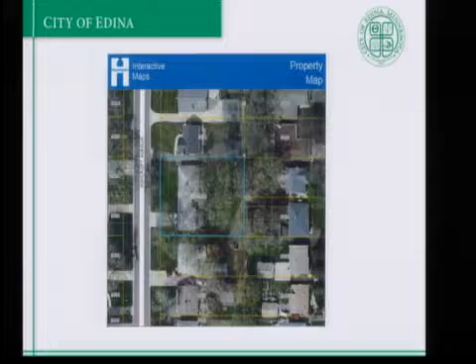It's double the size of all lots along this block and the block behind. This is an area that was originally platted with 50-foot wide lots. What you're seeing here is the original plat. You can see when this property was built, the home was built in 1953, and at that time the property owner purchased two 50-foot wide lots, combined them, and built one single-family home, Rambler style, as you see on the aerial here. This is a photograph of the existing home.

So what the applicant is proposing is to divide the property into two 50-foot wide lots, essentially reestablishing the original plat. The existing home obviously would have to be removed, with two new homes that would be located generally in the location of the existing footprint of the home.

Closer look at this is the existing home as it sits today. You see there are a few trees on the site, not too many. They would not be disturbed with the building pads as shown here. This plat would be subject to the new tree ordinance, so should those trees be removed, they would have to be replaced. There's no plans, however, to remove those trees.

Minimum lot size in this area is 9,000 square feet, 75 feet in width, and 135 feet in depth. As the Commission recalls, in neighborhoods where the lots are larger than 9,000 square feet, 75 feet in width, the minimum lot size becomes the median of all homes within 500 feet. However, in this neighborhood, all of the lots are smaller than the minimums required. So the median in this area is 6,790 square feet. The median width is 50, and the depth is 135.

So while the proposal is consistent with the median, it does require variances from the minimum lot area of 9,000 square feet and 75 feet in width. So the requests before the Planning Commission are for those two variances and the subdivision, the preliminary plat.

So the primary issue for consideration is in regard to the variances. Are the variance findings and criteria met? In this case, staff does believe that the criteria is met. The practical difficulty in this situation is the existing size of the lot. It's not a condition that was created by the applicant. Again, it was the original property owner who combined those two properties. So they're sitting today with a lot that's double the size of everyone else on this block.

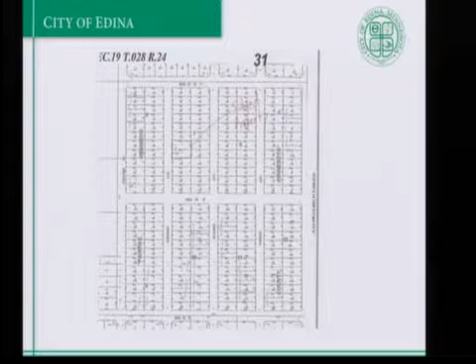Again, you see the original plat. So staff also believes the request is reasonable. It's again similar to everything that you see across the street, to the north, to the south, and to the east on this block. Again, it restores that original plat. If this were denied, they would be denied a use and a size of lot that everyone else on this block has today.

There have been similar variances requested in this area. This is a map showing over about the last 8 or 9 years. Three of them have been approved and three have been denied. The three that have been approved are in this upper area here, 1, 3, and 4, and those denied are a little bit further south.

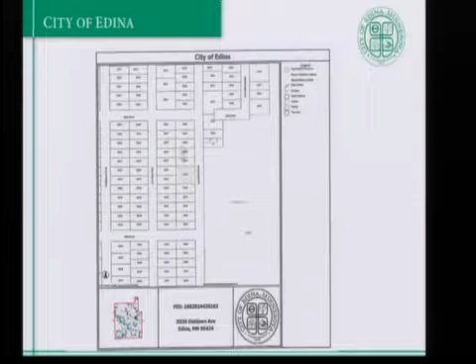To show you some of the detail, this was one that was approved at 5920 Oak Lawn. As you can see, the proposed subdivision was the last one on the block, similar to the one before you this evening. So again, this one was approved.

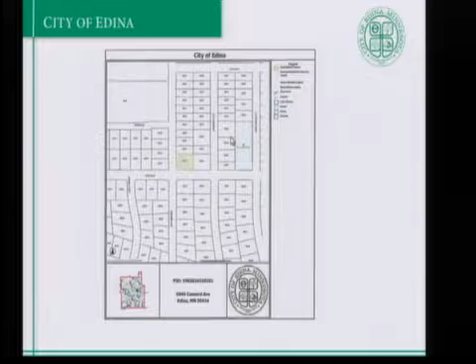To show you a couple that have been denied, this one down in Concord is the most recent denial, back in 2012. It's a corner lot, and you notice the lots are larger to the south, and there's some larger lots to the west, with the adjacent property to the east. The median in this instance came in at over 10,000 square feet, and the median width was 77 feet. So that one was denied.

And then some over closer to Pamela Park, right in here. This one on Oak Lawn was one that was denied. And there was this one on Brookview that actually shows up on our list in the staff report twice—one was withdrawn and one was denied. Again, this is an area where the lots are 100 feet in width, so those were denied.

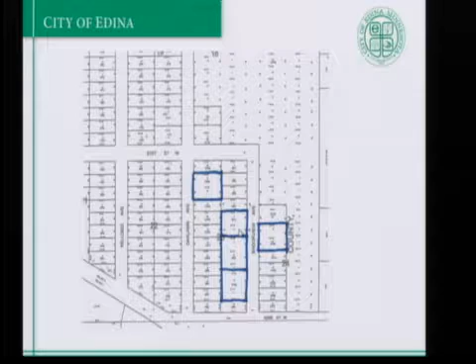So in conclusion, based on the findings in the staff report, staff is recommending approval of this request subject to the conditions that are also outlined. So with that, I can stand for any questions.

Thanks, Gary. Any questions for Planner Teague? Yes. Okay, so I'm not sure if there is some geographic favoritism in regards to accepting or denying subdivisions, but where does this particular lot fall in relation to the ones that have been approved and denied?

Good question. It's located roughly right here. Okay, so kind of in this northern area where they have been approved. This area up here, the lots are smaller. Down a little bit further south, there are more lots that developed as 100-foot wide lots. Okay, thanks.

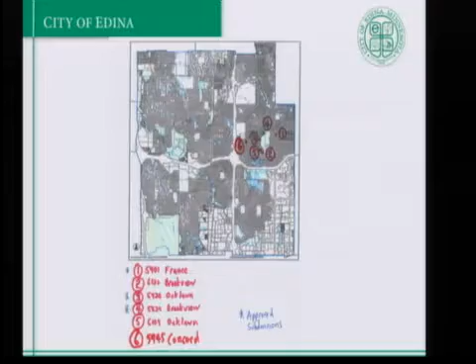Anything else? Commissioner Forrest: I understand that two 50-foot wide lots are a reasonable use, but what's actually the practical difficulty here? Because they are not being denied the use of their property, as others in the neighborhood can use theirs.

They have a house on it. They certainly have a use of their property, but the practical difficulty, or the physical uniqueness of the site, is the fact that—let's go back to the site—they are sitting on a lot that's double the size of everyone else on the block here. So they have reasonable use of their property, but is it reasonable in the context of everyone else on the block having a 50-foot wide lot?

And what makes it unreasonable then, that you can't have two houses on that parcel? Well, it's somewhat subjective. You could think it's reasonable to have a single-family home on the property today. I guess what I want to know is what's the difficulty here? Because, to me, to have two homes there, the only thing I can see is the economic advantage, and that's informative but not definitive in our decision.

Yep, and you can certainly have that opinion. There's no right or wrong in variances, as you know. So it's a question of reasonableness—is it reasonable to require them to have a 100-foot wide lot where everyone else on the block has a 50-foot wide lot?

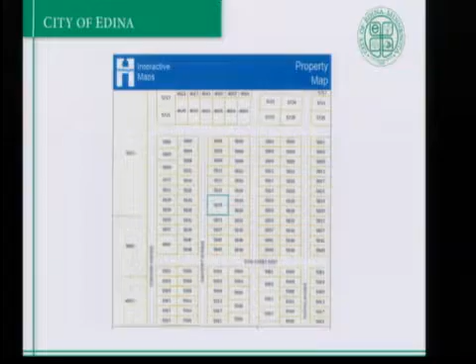Commissioner Hobbs: Did we get any correspondence from any of the neighbors? We did not, either for or against.

Commissioner Lee: I actually landed on that same point there. I was kind of questioning how did that end up under the category of justification for practical difficulty, unless there were different setbacks or something like that extended on a larger lot, but I don't believe that that's an issue here. I'm just thinking maybe it would be more helpful if under that category it explained more about literally the ability to develop the land, sell off half of the parcel. That could be perceived as a difficulty, versus 'I have a big lot and I don't enjoy the benefits of a smaller lot'—that's not quite a difficulty. So I had the same reaction.

Commissioner Navarro: There's a couple of trees in the front yard, one kind of on the north end of the property and one on the south end. The one on the south end, will any adjustment to that tree be required to build two houses?

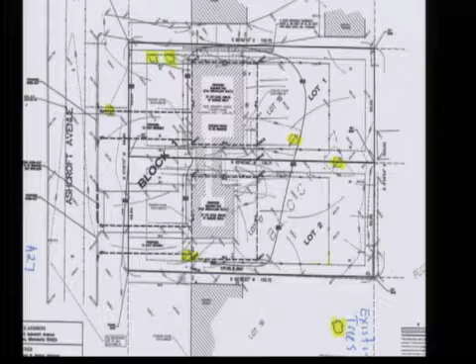And will the one on the north end require creative engineering to put in a driveway? So the trees you're referring to would be this one down here? Is that the one? At least with the footprints they're showing today, the trees could be retained. Those kinds of things would be reviewed as part of a specific building permit that comes in on each individual lot. A photo from the street view would probably show the layout of the trees a little differently.

So yeah, that's it right there, towards the blue house. You see it's got all these branches. The one on the south end of the lot has all these branches coming north. I believe this one's on the neighbor's property. The big one here? Yes. Okay, so that is the one that's shown on the...

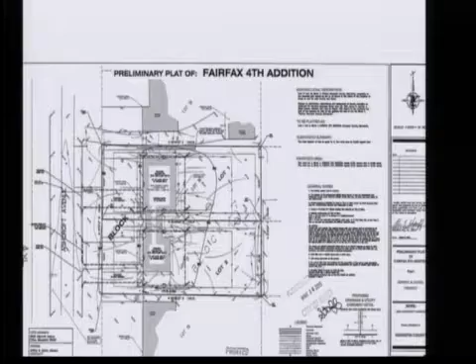And so I'm wondering, with that tree, will anything have to change? Will that tree be affected? And then on the one on the north end, I'm wondering how the driveway would be laid out. Maybe the applicant could speak to that too, unless you have a particular point of view. It depends where that driveway is going to go.

Anything else for Carrie? Thank you. So next, if the applicant wants to give us a little insight into what's going on and what your thoughts are.

They've got a PowerPoint too.

You should also introduce yourself and tell us where you live. Maybe we know that already, but... Yes, I'm Jeffrey Johnson. I live at 5825 Ashcroft Avenue, and with me today are Janine Johnson—she and I are wife and husband, we're the owners of that property—and to the left of Janine is Kim Moline, our real estate agent who's advising us in this process.

Thanks for the opportunity to speak, and I think I'll be able to answer some questions about the tree and some things. I have a little PowerPoint presentation, not a long one, that I wanted to present. Our property is located in what's called the Concord neighborhood of the city of Edina, if you're familiar with it. Ashcroft Avenue is a very small street, only three blocks long. It's east of Highway 100 and west of Wooddale Avenue, kind of between the school grounds and to the east of them.

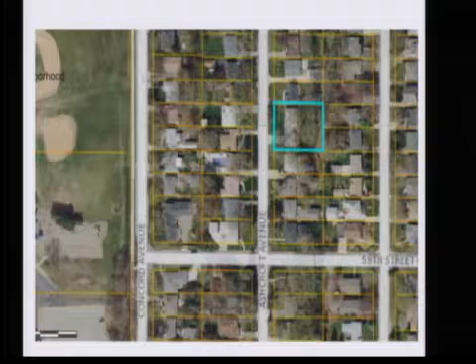It's a small street, and we sit mid-block at 5825. We've been residents of Edina since June of 1980, and we bought this property and have lived in it since July of 1981. Here's where our property sits—you'll notice it's mid-block. On the screen you can see 59th Street and Ashcroft, and we're kind of mid-block there. There's a couple of lots to the north, just off the screen, that would take us up to 58th.

Here's a closer image identifying the property as it's laid out right now. This property is two lots that were in what's called the Fairfax Plat of the city—lots 17 and 18, block 7. You'll see those configured on this drawing. Each of those are 50-foot wide lots, and they're almost 136 feet deep, and that's the size of the two lots.

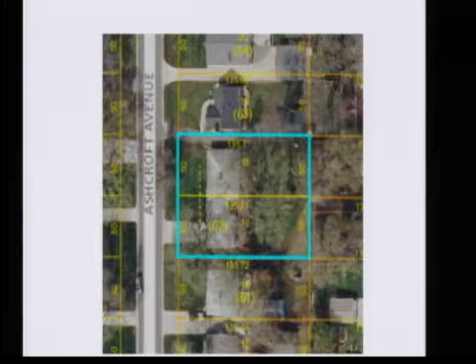The legal description, again, is lots 17 and 18 of Block 7 of the Fairfax Plat. That's how it was platted back in the 1940s when that plat came into the city. But most of the homes in the Fairfax Plat were actually built in the early 50s, post-war—there was a huge building boom because Edina High School was built in '49, Concord School in '52, and then in '56 the junior high, now called the middle school. That created a huge incentive to fill this neighborhood out.

The north lot was purchased by the former owner that we bought the property from in 1981. They bought the north lot in 1953 and built the 3-bedroom Rambler, which sits entirely on the north lot. The following year, in 1954, they bought the adjoining lot to the south, lot 17, and pulled a building permit to build a breezeway and a double garage.

I'm not sure that really got built in '54, because in 1956 they pulled another building permit to build a breezeway and a double garage. So I think it might have been in '56 that it really got built, because the breezeway dimensions in the '54 permit don't match the size of the breezeway that we've now made into a full 4-season family room.

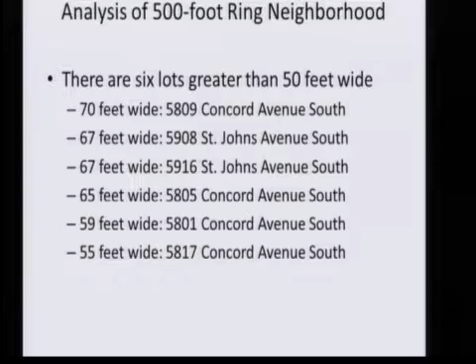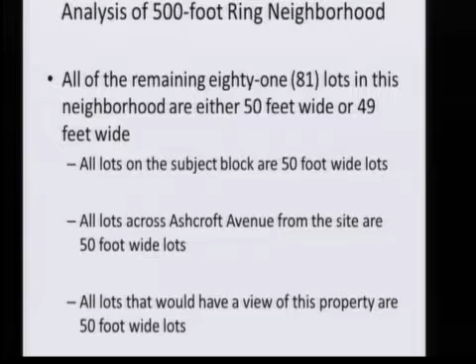All of the remaining 81 lots in this neighborhood are either 50 feet wide or 49 point something—the corner lots are 49 point and a fraction. All of the lots on the subject block are 50-foot wide lots. All of the lots across Ashcroft Avenue are 50-foot wide lots, and all of the lots that would have a view of this property are 50-foot wide lots.

Now I want to get to the main four questions. The first is kind of a compound question: in order to grant a variance, we have to see if this would relieve a practical difficulty and that the use proposed by the applicant would be a reasonable use. Let me start with reasonable use—I think that's the less controversial one, based on the questions earlier.

There are many, many lots in the city of Edina that are 50-foot wide lots, so I think clearly a 50-foot wide lot is a reasonable use in our city.

Now, is there a practical difficulty here? The way I look at this is: if the variance were not granted, we couldn't do with the land area we own the same thing that neighbors who own the same land area as us could do with their two lots. Yet we're zoned the same. Within the same zoning district, our lot—same zoning as neighboring two lots—we couldn't do the same thing as anybody else in our neighborhood without the granting of this. I think that's the practical difficulty as I see it.

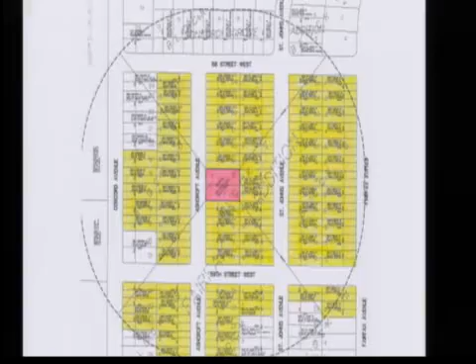The next question is, would granting this be in harmony with the general purposes and intent of the zoning ordinance? We feel that it would be. The proposed subdivision and variance would meet the intent of the zoning, as it would create two lots similar in size to the other lots within the neighborhood. It would also restore this property to its originally platted condition, which was two 50-foot wide lots.

Originally, when this plat was approved by the city, there were two lots of record. They were joined together when the addition was put onto the home.

Then finally, the last question is, would granting of the variance not alter the essential character of the neighborhood? I think in looking at the essential character, we always look at it from a zoning perspective—what are the sizes of the lots, the widths of the lots, the depth of the lots?

So when you look at the work our surveyor did, we meet the median. In fact, we well exceed the median, because when you aggregate all of these, we're really like at the 3/4 level—3/4 of the homes, or lots, in this neighborhood are 50-foot wide lots. So we're well past the median, which would be the halfway point. We're well past that.

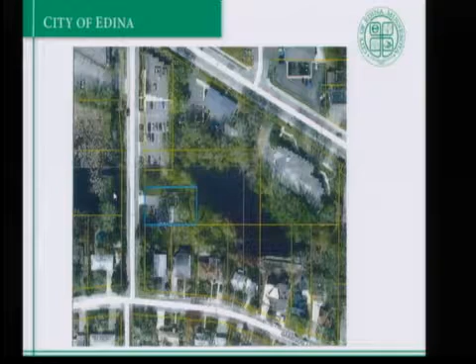Mr. Chair, members of the Planning Commission, this is a return item, so I'll be brief. It's a request for front and side yard setback variances at 6205 Wooddale for Kelly Hayes. The subject property is located on the east side of Wooddale. It consists of a story and 1.5 home that used to have a detached single stall garage, since removed. It is directly south of public property, and north there's a parking lot adjacent to an office building. South of the subject property is a single family home. Across the street is a pond, and it also backs up to a pond.

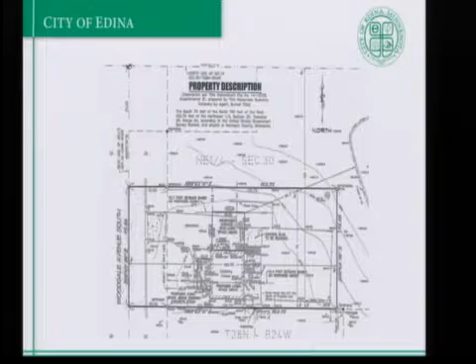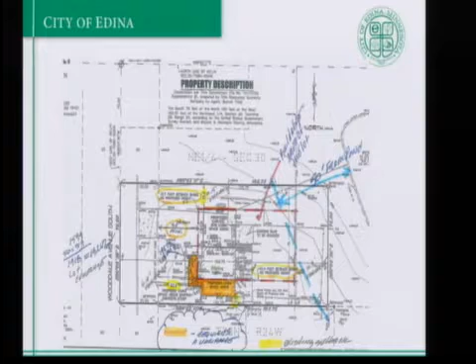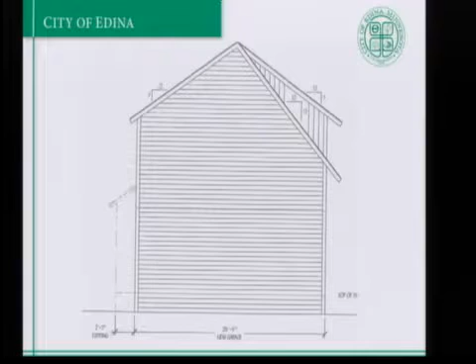They are consistent with the plans that were submitted prior that were hand-drawn. There are both levels illustrated here in floor plans, a colored-up version indicating what is remaining in terms of wall area and what is going to be new. The second floor will be new; they'll be removing the half-story above. They also included some wall sections. These were the original drawings, and they are consistent in terms of dimensions, so it really doesn't affect the variances.

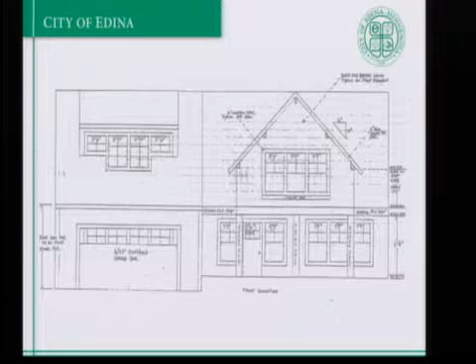And again, this is the original drawing, and they have an inspirational photo of what they would like the house to look like. Staff does support the request. With that, the homeowner is here to address any questions you might have about the drawings that were submitted.

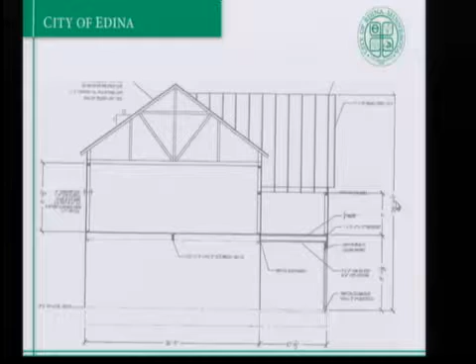Thanks. Any questions for Planner Aaker? Yes, Ms. Carr. I was wondering what's north of the property, because looking at the drawings, the north elevation view is of the side of the garage on the first floor, and there's not a single window. I'm wondering what's on the opposite side facing the house. Is that the parking lot? A parking lot, and then there's a strip of land between the parking lot and the subject property, which is public property owned by the city to access the drainage pond behind the house. Okay, that's fine. If there's a parking lot there, I don't have a concern.

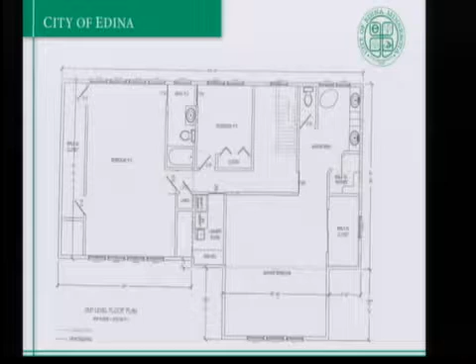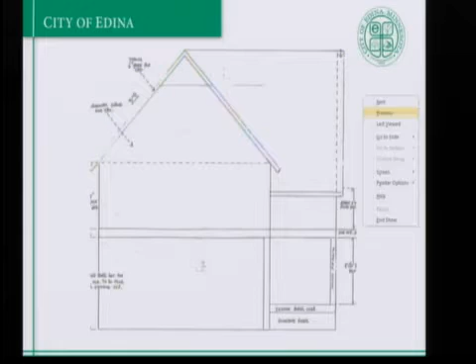Commissioner Lee: Chris, could you put up that photograph of the back of the house? Actually, that's the first time I've seen that photo, so I don't know if it was in our packets. The existing home, the rear view? The original drawing? The photograph was of the front of the house, and then there's a photograph of the home directly to the south. Is that the one you're asking about? Yeah, can we just see those photos again? I flipped through them and might have seen or understood it incorrectly.

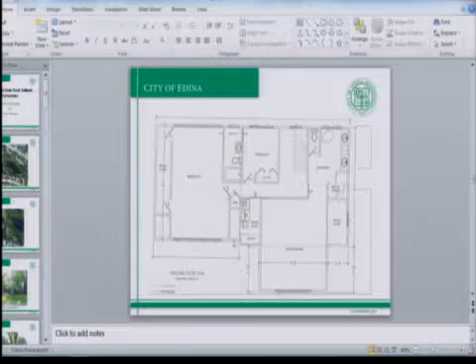Any other comments, questions? I did have one more question. I know we've been through this a couple times, but I'm still figuring it out. So the height of the house is taken to the center of the gable?

For setback purposes, the overall height is measured from the average existing grade along the new front building wall to the top of the ridge. That varies if you're looking at the front of the house. It's about 26 feet if you're standing on the concrete portion, otherwise a little over 28 feet. The actual overall height could be up to 35 feet because it's a wider lot, so it's well below the allowable overall height.

So right here, the report said it's 25.8 foot height measured from average grade to the midpoint of the gable. Which gable? That would be on the side, this one. So when you say midpoint, it's halfway triangular between, it'd be the middle of the triangle basically.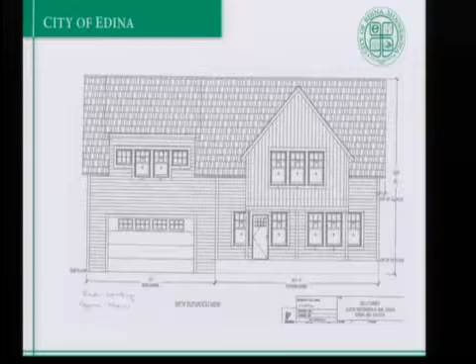And again, why is it that we take the midpoint of the gable versus just the ridge height? Well, because that's how it's always been written in the zoning ordinance, prior to even when I've been here. But in any case, that's for purposes of determining the side yard setback.

Correct. So there is a difference if it were a sloped roof or a hipped roof. We measure to where the shingles begin on the side yard, so it's a lower measurement generally. So you do see a lot of hipped roofs on the side. We don't see a lot of gable ends on the side because it has a tendency to make the side yard setback requirement deeper. Roofs are getting a lot more complicated now, so this is probably one of the more clean-cut ones.

So what we're doing here is 6 inches for every foot of height above 15 feet. Correct. All right, thank you.

Anything else? Thanks, Chris. If the applicant wants to come forth and give us any updates as to what she's done differently from the last time.

Hi, welcome back. Nice to see you all. 6205. You even brought your helper again? I did bring my helper, he's my good luck charm. Hold on, I'm a good luck charm. You are, so this time maybe it's been reduced. Last time not so much, I've been reduced to an inanimate object.

So what I did differently on the drawings was we had them put on CAD so they were a little easier to understand, and then had it color coded for the commission in regards to what's staying and what would be added. The red is what is staying, there should be a little code on the copies I made for you guys. The green shows what would be new, just so you can get a feel for the percentage of the house that was going to stay. That's pretty much the only difference in the package, we just had them clearly drawn so we could express ourselves better and note the parts of the home that were staying and what would be new.

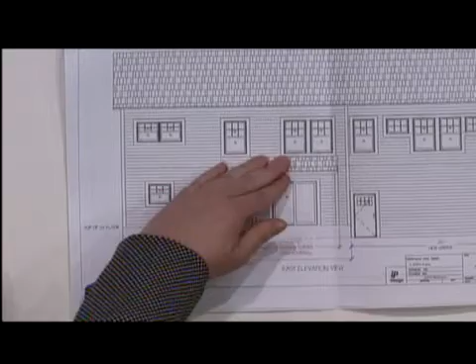The second floor is going to be exactly the way that it is. We have to add on, I guess about a foot, because the ceilings on the second floor are not quite 8 feet, so we'll be adding on to them, not removing them. Okay, I understand the second story is completely new.

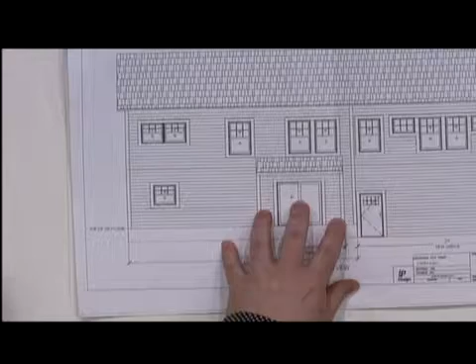Back to the first floor level, right where your hand is — that sliding door is new? No, that's there already. And the window to your left, is that there too? Yes. Okay, thank you. This elevation shows it a little bit differently.

Now you've got the roof back in there, so we don't have that on our drawing, but that is staying, definitely staying. And the door there to the garage is existing? That would actually be new when the garage goes in, because that space is not there yet.

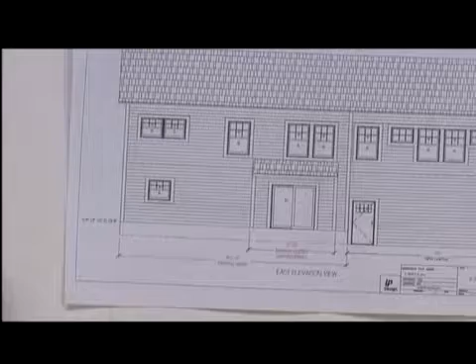Okay, so on some of these elevations I just wanted to check — if you could go to your section. The roof trusses, what's the purpose of that second floor? You've got that sort of knee wall put in there, for the ceiling height. Am I pointing to what you're speaking of — is that your closet?

Yep. Okay, and what's the purpose of putting that whole thing in there, rather than just taking the wall straight up? I guess I'm still trying to understand how this relates to the variance in front of us, if you're into the building like this.

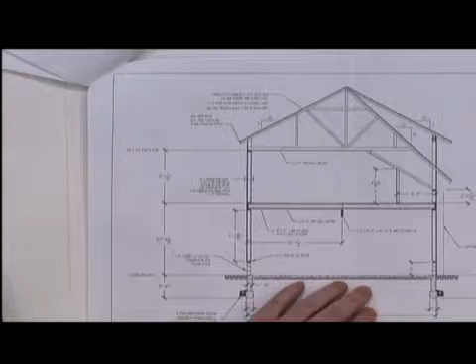Well, because it has to do with the support of it. So I'm questioning some of the support issues I might have, about taking out that much wall and whether it's supported. So you're playing a structural engineer here? No, I'm just asking so I can understand this.

Okay. I don't know if I know the answer to your question. I know in looking at it from the bedroom...

Here, honey, you don't need to touch it. Thank you, you're good. Okay, go on, you want to hold that? That would be like a huge help. Don't bust out a wrap though. Where is the second floor? Did I go right past it? I'm looking for it. Okay, here we go. I feel like a news reporter.

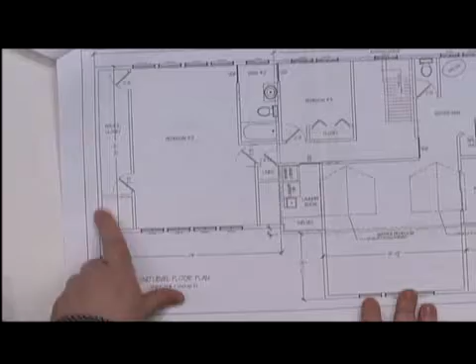If you look at the page I have up here, we're speaking of this right here, is that correct? That's correct. This space right here, as it relates to the way the gable is in the front - it's not really usable space, and I'm able to frame in his closet there. If I didn't have that, because of the pitch of the roof and the front, there's really not anything I could do there, if that makes sense.

Okay, well, that is a very awkward condition. I'm concerned for the pitch of that roof, where it's being supported on that wall. It looks a little tentative. I also wanted to just make sure I understand the roof, your drawings on your elevation.

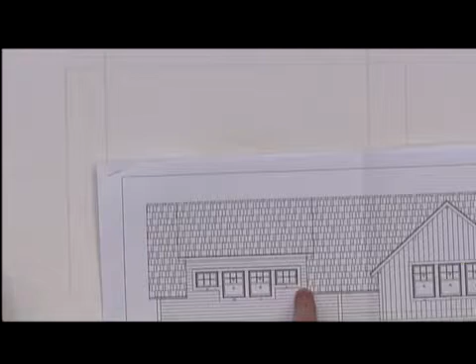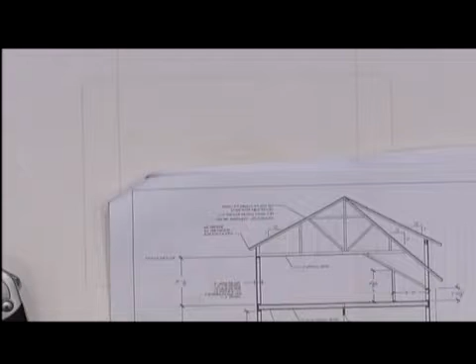And if you look at the cross section, which is on - pages, I could keep it straight. If you look at this one here, you can see that it's set back. Okay, and then on your south elevation, could you take a look at that for a second? This one here? Your south elevation. This one? Yeah, this is the south.

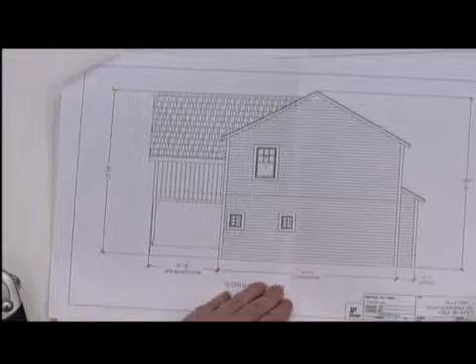Okay, you're showing your roof line on your front elevation coming down below the gabled end there. We're seeing it from the side here. So your gabled end roof is lower in this elevation than the regular roof for the rest of the house. But from the front elevation, the roof line is actually much lower than the gabled. Do you see where your gabled end is there? Yeah. Do you see how low that is right there, that point where your finger's hitting?

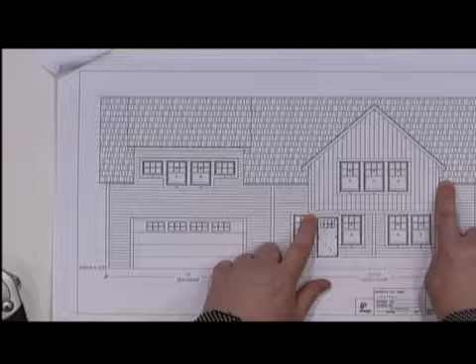Yeah, on the right-hand side. It's much lower - now take a look at your gable, see where that roof edge ends? This here, on the bedroom portion? No, over on the right-hand side. Okay, yeah, your roof for that gabled portion there - yeah, it's much higher.

Okay, all right, there's something - the issue is, from your elevation, just like in your section, when you are doing an asymmetrical roof like that, you've got substantial load coming down to that point, which goes back to my original question on this section. How is that being supported? Because you essentially truncated that truss.